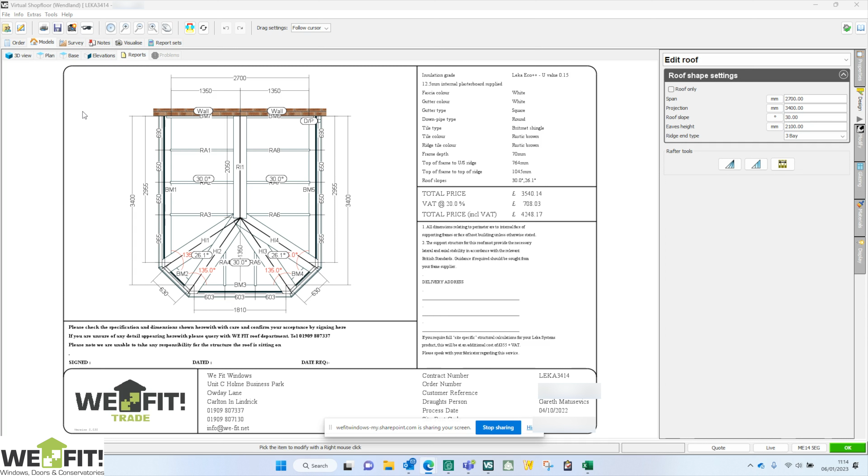When we're happy to go ahead, we process and print the paperwork for the shop floor. Go to our report sets, we deselect - there's only 2 reports we need for this roof. We need the fabrication report and the boxed item report. I click those, and now the computer is creating those for me.

So we can see all of these pages, part of the fabrication report. The guys on the shop floor can see the type of roof it is, and they can see all the details that are important to that roof, like the colour of the fascia and the colour of the tiles.

The next page is an ancillary list. These are all the parts that go inside your boxed items, such as your hip ends, your gutter parts, small fascia parts, all your screws - those types of things. That's what we call boxed items, so that's your ancillary list.

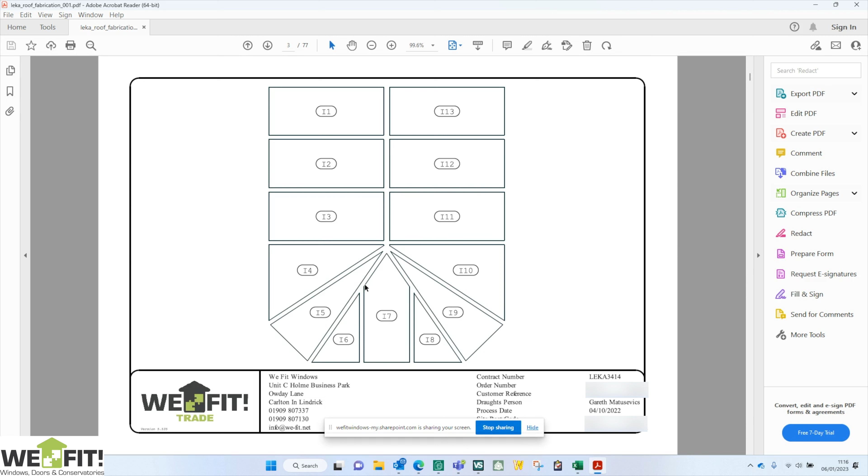Then you can see the insulation - this is all pre-cut on the shop floor, so it's easy fitting. These are your top boards, again all pre-cut in our factory.

Now the reason we do 2 sets is because on the shop floor, part of the factory is kind of like what I'd call a production line. So you've got one area for your fabrication, which is all your bars and your insulation, and then you've got your other area, which is your boxed items, your gutter and your fascia. So we print off 2 sets of paperwork so we can split those accordingly to whichever part of the factory we want them to go.

As you can see, there's a lot of paperwork involved. This one's got 77 pages and this one's got 24 pages, so just give those a few minutes to print off.

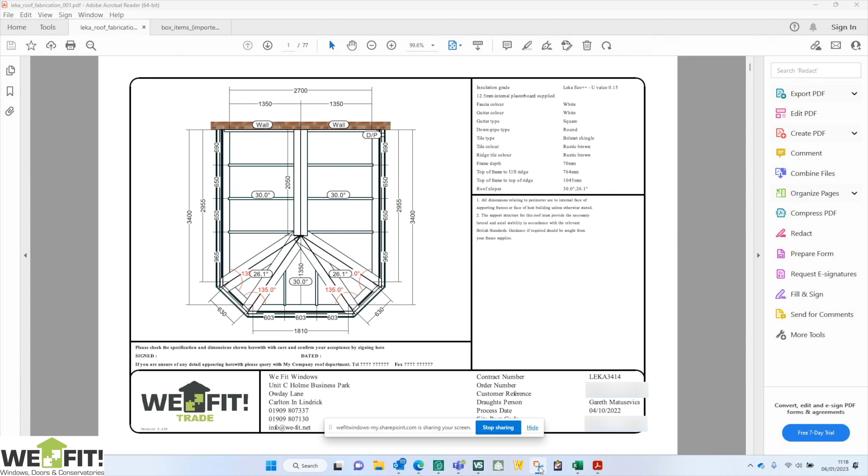In the meantime, while those are printing off, what I then do is create a delivery note. So I take a snapshot of the roof like that, open up an Excel spreadsheet, and type in all the information for Warm Roof Division.

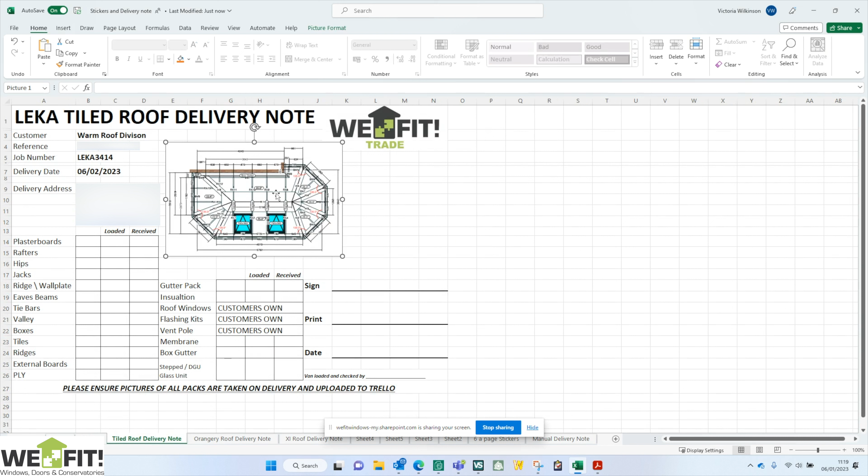I pop in the reference and their unique Leka number, the delivery address and also the delivery date - so this is due on the 6th of February 2023. These stickers or labels go on to each pack, each pack gets a number, and then they're able to match that off on this delivery note.

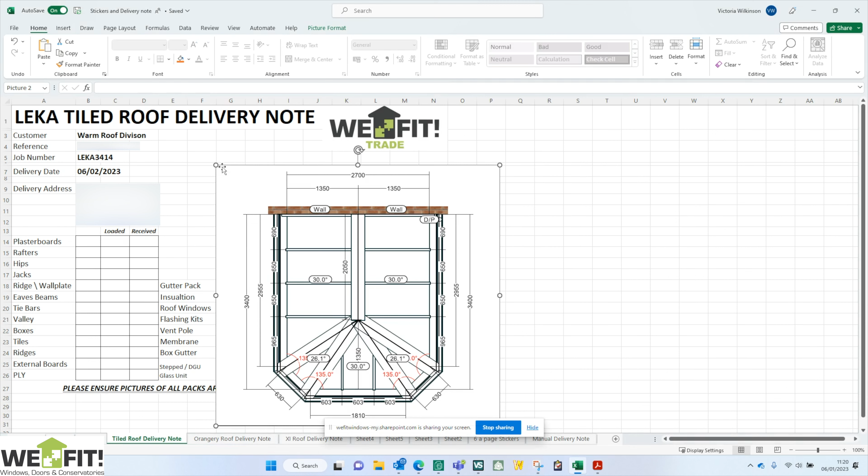So if you can see on the delivery note, it's pulled through all the information. Just remove these, and then I add in the roof design. The reason I put the roof design on the first page is so everyone - the person delivering the roof, the person accepting the delivery - can see what to expect. So yeah, that looks right.

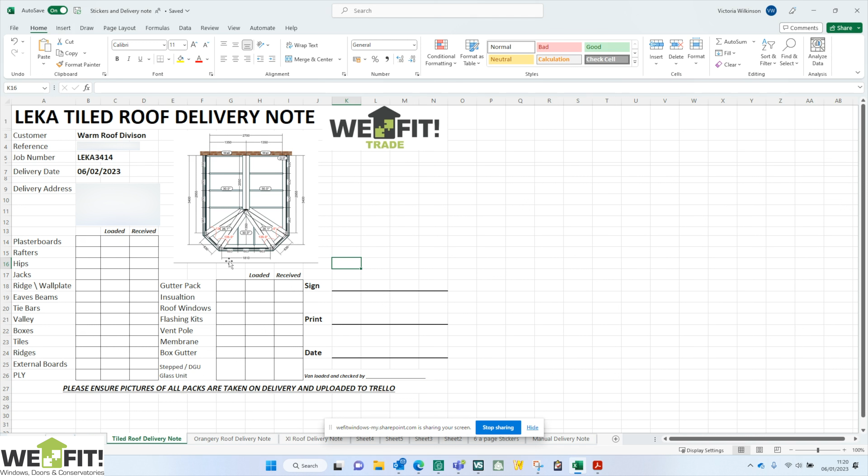I'll accept the roof, so we print 2 pages of these off, and print some labels off. Okay, so everything's printed off now, including our labels.

Right, so the next part is to let our customer know that we have processed this roof. Each individual job has a card, created right from the quoting - so this is Warm Roof's division card. This has got everything in here. Everyone in the office has access to this, and the guys on the shop floor have access to this too, so this should have all the information on there. If any paperwork got lost, it should be all accessible here.

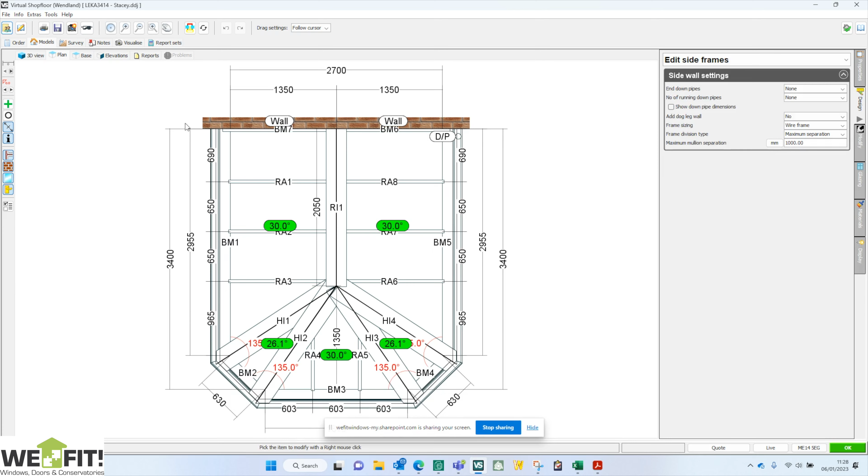So I'm going to let our customer know this roof's been processed, and this also gives them the opportunity to have a final look at the plan and check it against their paperwork before it actually goes into production. I email the customer and send them a delivery confirmation. This information tells the customer what type of roof to expect, the quote number and the job number. This is also a good point for them to have a final look at the roof to make sure everything's right before it goes into production.

So I've attached that there. I'm happy with everything, and the last thing for me to do on the Trello card is to say that I've created the paperwork and the paperwork's complete. There you can see it's put my name in when it was completed, and that's just in case there's any issues - you can come back to us, or we can come back to each other, if there's any issues or questions.